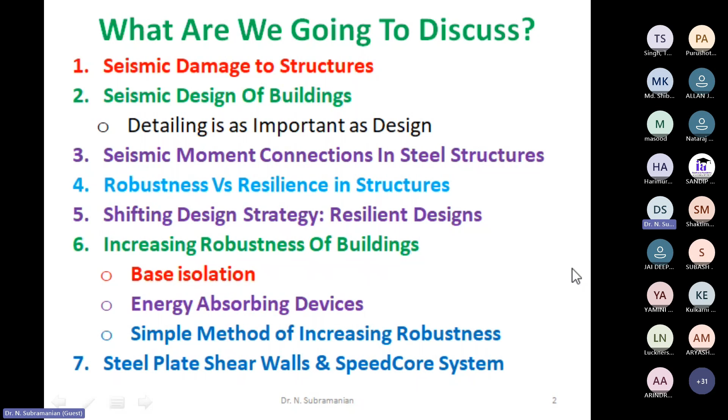There is a famous saying: earthquakes do not kill people, but improper design and detailing do. This is very correct, because in most of the previous earthquakes, we have seen these collapses occur.

Now we will see the factors influencing seismic damage: peak ground acceleration, peak ground velocity, ratio of PGV versus PGA, peak ground displacement (which is difficult to determine), amplitude, magnitude and duration, distance between epicenter and site, geographical conditions, soil properties at the site, and foundation type and characteristics of the building. So there are many factors influencing seismic design.

Here we see the damage of a steel building in Mexico City in 1985, which is a very important earthquake because Mexico City is on a soil bed which is very, very soft.

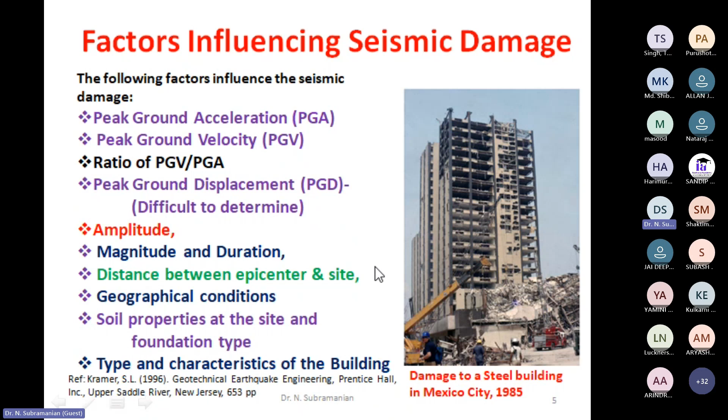As I already informed, during several past earthquakes we have seen several failures, and some of these I am listing here, with some shown in photographs: shear critical columns, weak columns and strong beams, sudden change in stiffness, plan and vertical irregularity. This shows a T-shaped building which collapsed completely. Also torsional irregularity, unconfined beam column joints, weak stories, floating columns, etc.

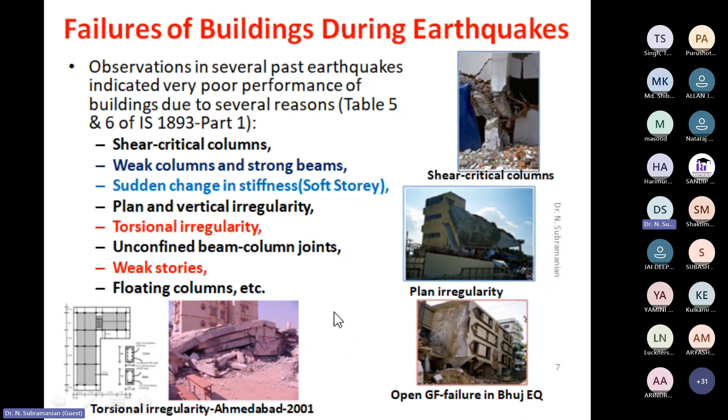Actually, in our designs, columns are more important than any other component, because columns transfer all the loads from top to the foundation. But enough care is not taken in the columns, and several failures have occurred.

These are categorized as buckling of column reinforcement due to insufficient lateral ties, insufficient transverse reinforcement in beam column joints (which you cannot see, but is due to beam column joint failure), poor anchorage of beam bars in beam column joints, provision of strong beams and weak columns, and improper detailing in plastic hinge zones.

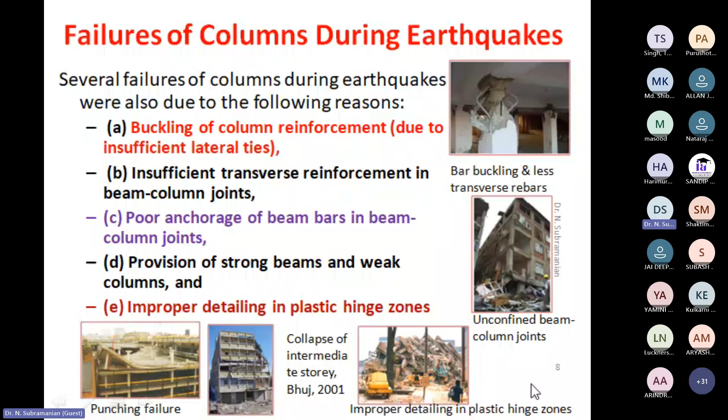And this failure is due to punching failure, which is not exactly a column failure, but due to the thin slab. I wanted to show this slide always.

Of course, these are other failures during earthquakes. This is pounding, that is when two buildings are close to each other. And this is a soft story, we have already seen. And then the collapse of a water tank.

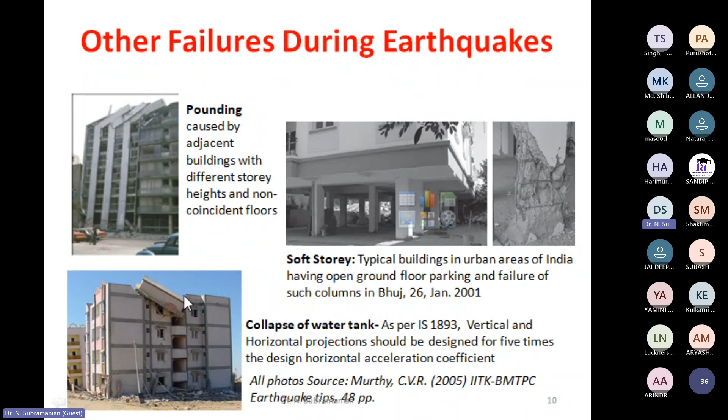Actually, as per our code, all projecting things, horizontal as well as vertical, should be designed for 5 times the design horizontal acceleration coefficient.

This I just wanted to include. This is a recent Myanmar earthquake. You might have seen this because it was viral in social media. This is the collapse of a tall building in Bangkok, the unfinished headquarters of the Auditor General's office, and this is the only skyscraper to collapse in Bangkok.

This building used flat slab construction, which is no longer recommended in earthquake-prone zones, in our code especially. Additionally, long slender columns were seen in the ground floor.

Probably this Bangkok soft soil could have amplified ground motion 3 to 4 times, and you see this collapsed building, completely collapsed. It was a new, yet to be opened building.

And when I saw this collapse, I found that there was a punching failure at the top, and then due to that, the last floor failed on the next floor, causing a hammer effect, and then it collapsed immediately within seconds.

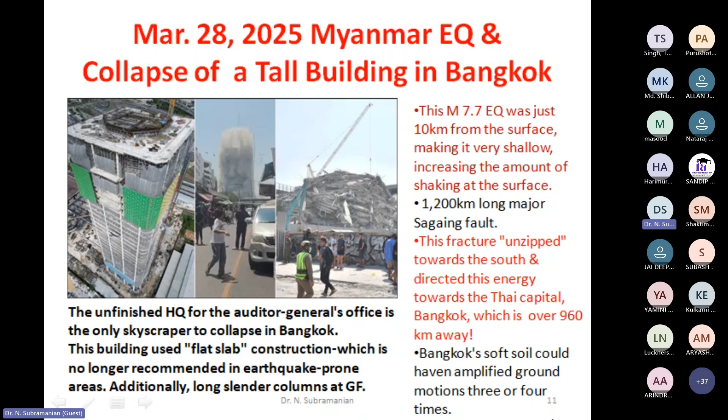So now we will see seismic design of buildings. As you all know, there are so many codes in India. IS 1893 is the basic code which is under revision.

IS 13920 is the detailing code for concrete structures, and there is only one more new code, IS 18168-2023, for seismic detailing of steel structures, and there is one more code, IS 4326-2013.

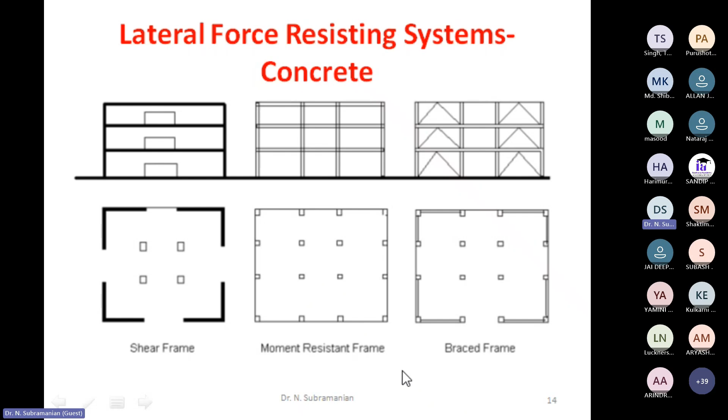So as per these codes, we have to have lateral force resistance systems, and I am showing some of the systems in concrete: shear walls. This is the best system, and then next is braced frame, and then finally moment resistant frame, which we are mostly adopting, which is not very good.

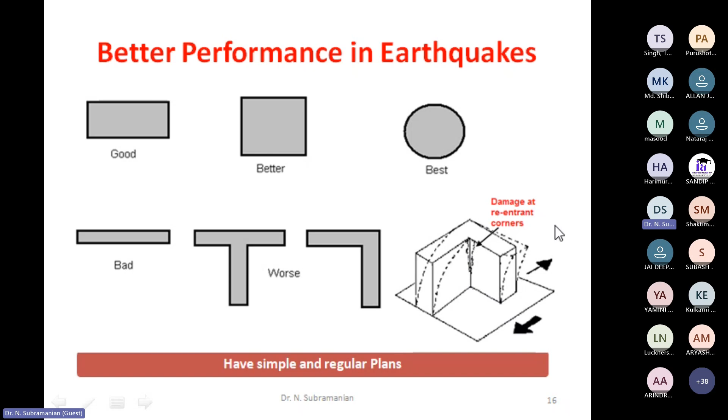Actually, before doing analysis, the planning is more important in earthquake resistant design. Unfortunately, this aspect is not controlled by us, it is controlled by architects. So whenever you see a plan, you have to discuss with the architect and educate them about the earthquake effects on those plans.

So the effect of asymmetry will induce torsional oscillations in structures and stress concentration at re-entrant corners, and hence they have to be omitted. Irregularities are to be avoided. They are listed in IS 1893 Part 1.

Of course, the 2025 version will come soon, and anyhow these things remain the same: plan irregularities, vertical irregularities. Under that, there are so many other categories you already know, or otherwise you can see IS 1893 for those details.

I just wanted to show this book. This is Seismic Conceptual Design of Buildings by Hugo Bachmann. It was released in 2002. You can download this book free of cost from the internet at this link.

Actually, this shows the basic principles of the seismic design of buildings. If your architect is adamant, you can even buy this or download the book and give it to your architect to show how to plan the buildings. So this shows a lot of planning of buildings and failures due to improper planning.

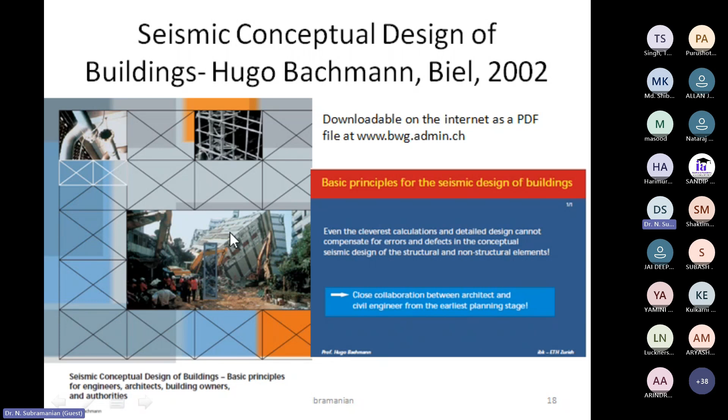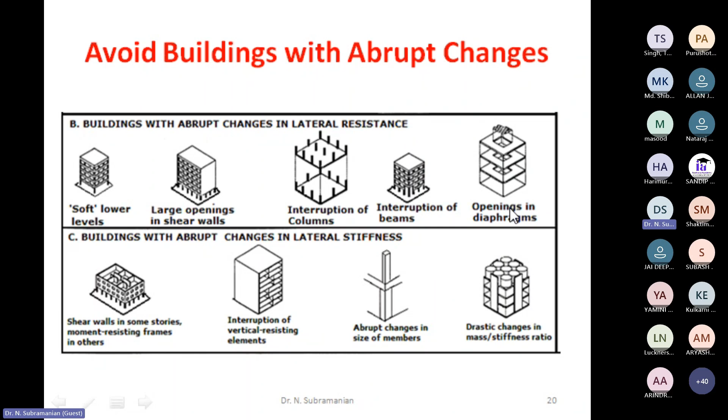The abrupt changes in the plan or the vertical configuration should also be avoided, as we have already seen. Interruption of columns, interruption of beams, interruption of shear walls, and openings in diaphragms — all these things should be avoided.

Can we design to resist earthquake with no damage? Yes, we can, but they will be very expensive and unwarranted for the small probability of occurrence of such catastrophic earthquakes, because no one till now can say when an earthquake will come and what its intensity or magnitude will be.

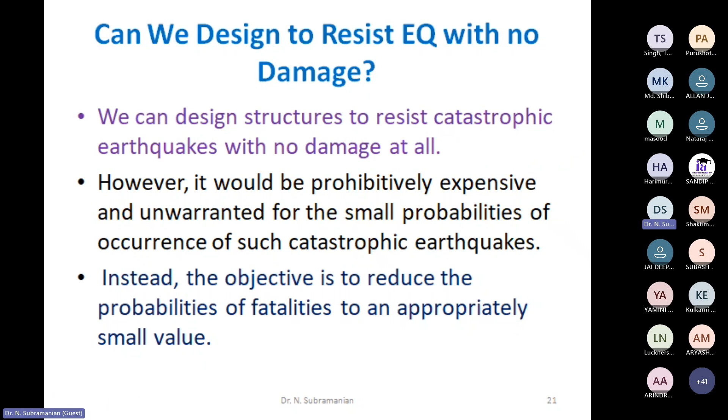So our objective is to reduce the probability of fatalities to an appropriately small level. Hence the seismic design philosophy used in IS 1893 is: minor and frequent earthquakes should not cause any damage, moderate earthquakes should not cause significant damage but could have some structural damage, and major infrequent earthquakes should not cause collapse — meaning there will be severe damage. Hence, design is done for much smaller forces than the actual seismic loads.

This is different from other loads like wind, dead, live and other loads, where we calculate and use the exact loads. It is not possible to predict where an earthquake will strike and its magnitude or intensity, so the philosophy followed is this: this is the actual linear response, but we also always have nonlinear response, so we consider ductility, redundancy, and overstrength, and then design for these smaller forces.

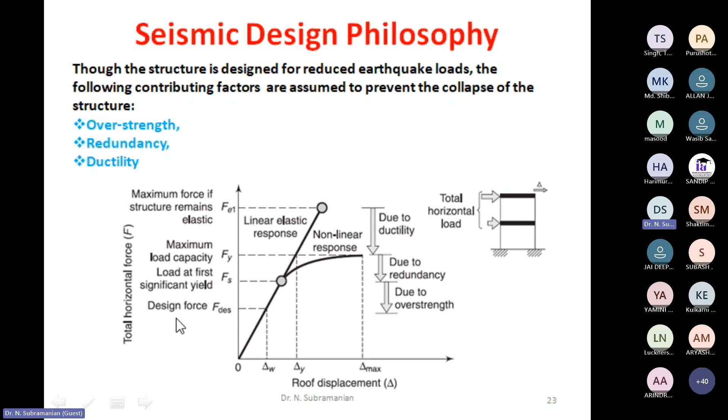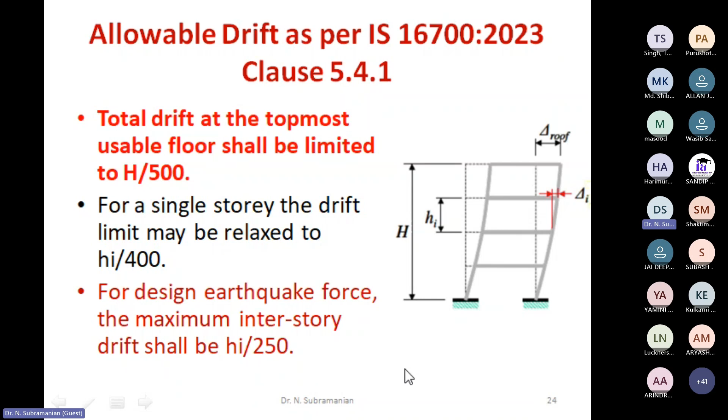One important thing I want to insist on is that we should always reduce the drift. The total drift at the topmost usable floor, as per IS 16700, is H by 500. For single story, the limit should be relaxed to Hi by 400, where Hi is the individual floor height. For the design earthquake force, the maximum interstory drift shall be Hi by 250.

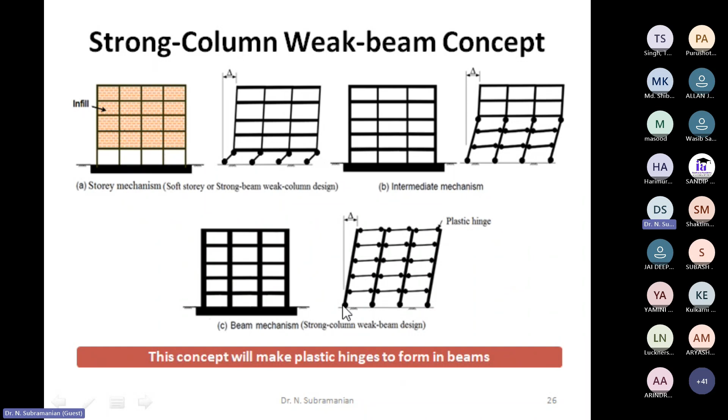This has been stressed in many seminars and webinars: we should have a strong column and weak beam, and we should not have a weak column and strong beam, because in that case all the columns will fail. This concept ensures plastic hinges form in the beams, and only at the end do hinges form at the column base. Once again, detailing is as important as design.

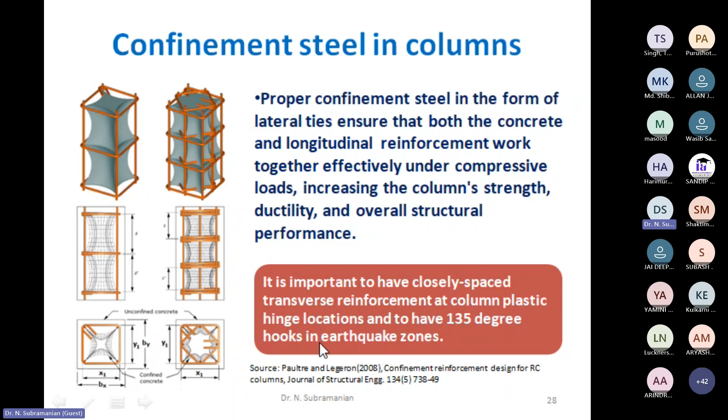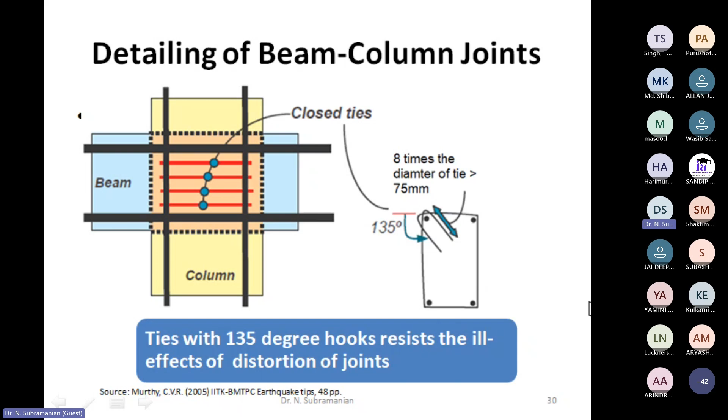If there is a short column, it is better to provide closely spaced ties throughout the length of the column, not only in the plastic hinge zones. Beam column joints are often omitted because they are very difficult to provide, but they are very important. Here also we have 135-degree hooks which resist the ill effects of distortion of joints.

Once again, detailing of shear walls: it is important to have closely spaced transverse reinforcement, spaced at less than 5D, where D is the diameter, in boundary elements of structural walls and columns. I have shown these things which you may already know.

This is a wall failure during the 2011 Christchurch earthquake in New Zealand.

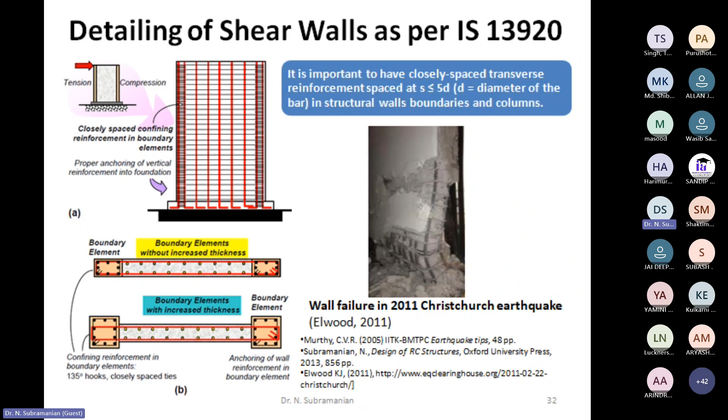Coupling beams are very good in earthquakes for dissipation of energy. Previously people were using reinforcement like this and this, but Professor Santakumar of Anna University, when doing his PhD with Professor Paulay of the New Zealand University, developed this system of diagonal reinforcement, which is now adopted in most codes.

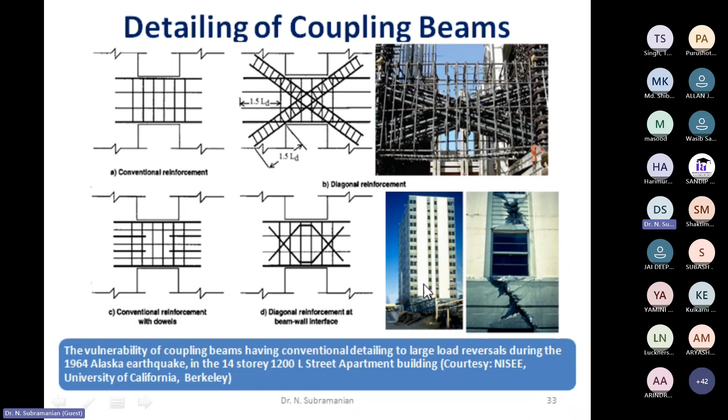You can see that using this normal conventional reinforcement, there was failure in these coupling beams during the Alaskan earthquake. This is a 14-story apartment building, from the 1964 earthquake.

Now we will go to see seismic moment connections in steel structures.

Of course, these structures are provided, or you can refer to pre-qualified connections for steel SMF for seismic applications, AISC 358-22. It gives details and design of several connections which have been pre-qualified. That means they have tested all these connections thoroughly, and then developed the equations for these connections, and those equations are all provided in this document.

There are mainly three strategies: toughened connections, strengthened connections, and weakened connections. The main aim is to shift the plastic hinge location from the beam column joint to a point away from the beam column joint. So mostly if you provide these connections, the plastic hinge location will not form here, but will form here. These are other possibilities: using cover plates, using ribs, using side plates.

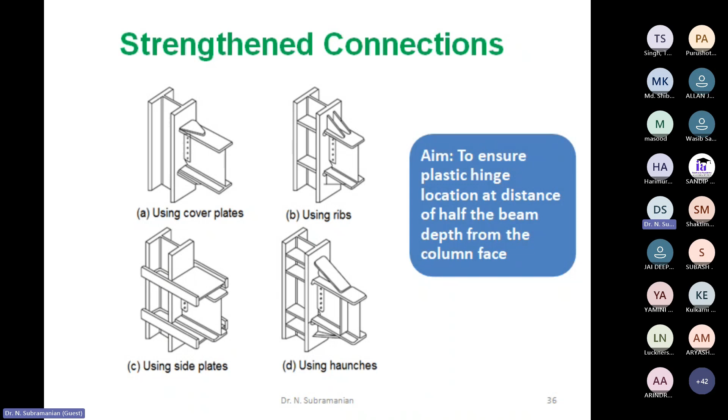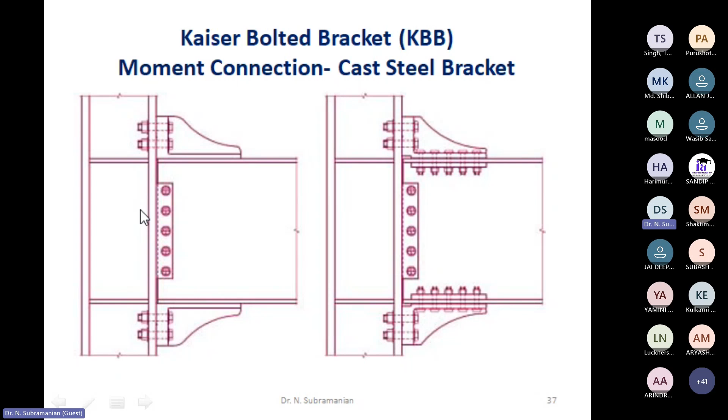Actually, the first thing which was developed was the dog bone weakened connection, where they shaved off some portion in the top flange and the bottom flange, and the radius is given here. There can be so many different possibilities: one is straight cut, tapered cut, and also through constant holes or increasing hole diameters in order to reduce the area, so that the plastic hinge will form away from the beam column joint.

Here I have given some cost estimates. This is a pre-Northridge welded flange bolted web. If you take it as one, other things are more expensive than this, because it requires extra fabrication. This radius cut dog bone joint is cheapest, 1.71 only. Of course, the relative cost is only for this joint portion, not for the total building. You see, top and bottom haunch will be the most expensive, because it requires extra fabrication and also extra material.

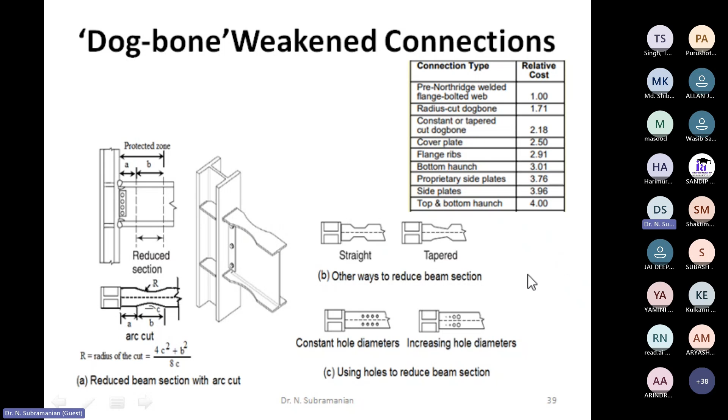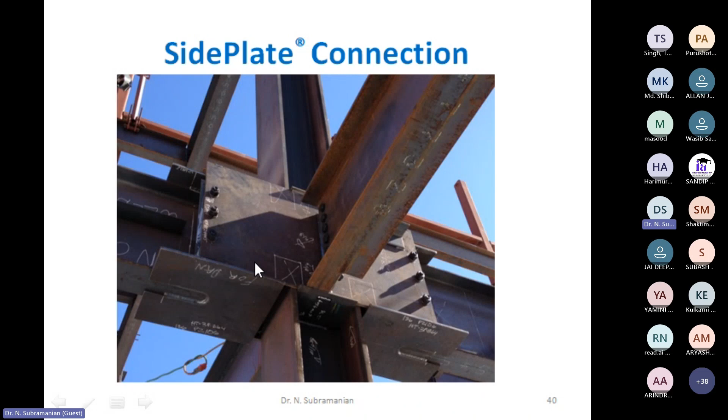Now we will see what is robustness versus resilience as applicable to structures. Robustness is defined as the ability of a structure to withstand events like earthquake, wind, fire, explosion, etc. without being damaged, whereas resilience is the capacity to recover and return to full function after experiencing damage from an extreme event, focusing on the ability to bounce back after disruption. Thus, robustness is about preventing significant damage in the first place, while in resilience there can be damage, but recovery is fast.

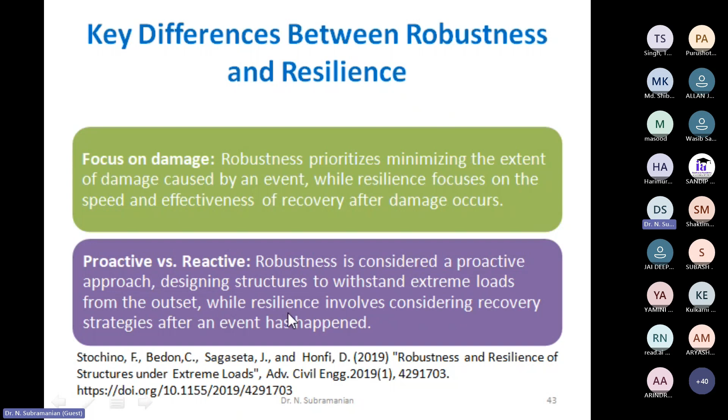So these are the key differences between robustness and resilience. One is focus on damage: robustness prioritizes minimizing the extent of damage caused by an event, while resilience focuses on the speed and effectiveness of recovery after damage occurs. So robustness is considered a proactive approach, while resilience involves considering recovery strategies after an event has happened.

Examples of robust and resilient design: a building with redundant structural elements and strong connections to prevent localized collapse in case of an earthquake represents robust design. Whereas in resilient design, a building with easily replaceable components and rapid repair mechanisms to quickly resume function of the building after a natural disaster.

I just wanted to show you an example of a resilient building. I will show one more resilient building later. This is the Empire State Building in New York. It is a 102-story building, 443 meters tall, and it was designed and built during 1930 to 1931.

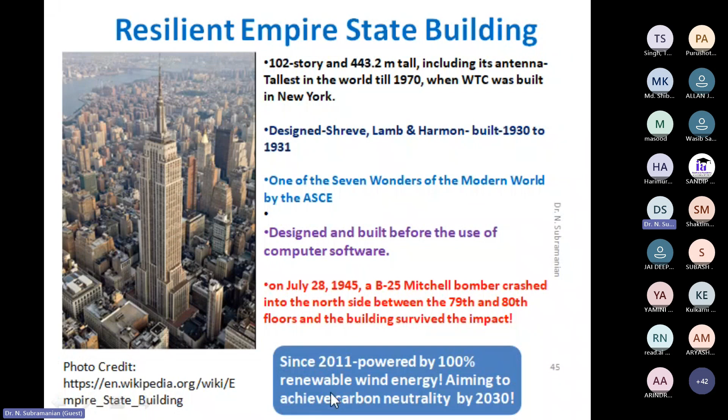A very interesting thing is that it was designed and built before the use of computer software. So you see that they built such a tall building without using computers, because big computers or computer software were not available at that time. On July 28, 1945, a B-25 Mitchell bomber crashed into the north side between the 79th and 80th floor, and the building survived the impact. Of course, New York is not earthquake prone, but even with such things the building is able to manage. Since 2011, it is powered by 100% renewable wind energy, aiming to achieve carbon neutrality by the year 2030.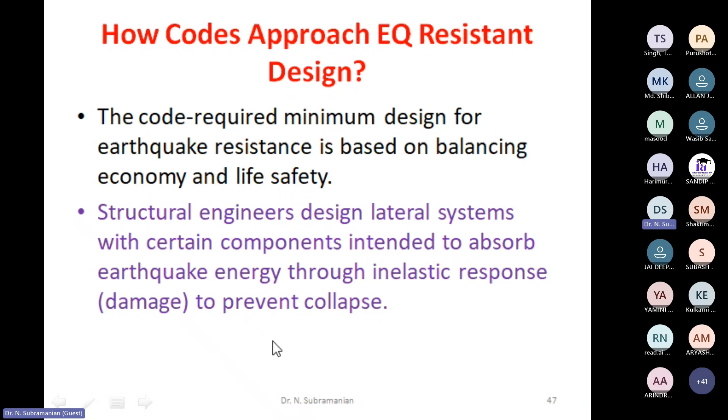So we will see now what is resistant design. The code requires minimum design for earthquake resistance based on balancing economy and life safety. Structural engineers design lateral systems with certain components intended to absorb earthquake energy through inelastic response to prevent collapse.

Let us compare the number of fatalities between the 2010 M7 Haiti earthquake, that killed 200,000 people, and the 2011 M6.2 Christchurch earthquake in New Zealand, in which only 180 people died. Clearly, the ductility-based seismic design adopted by our codes is successful at providing life safety. That was the main intention of the codes.

But in Christchurch Central Business District alone, more than 1,400 buildings were demolished. At the time of the earthquake, the population of Christchurch was approximately 350,000 only. Think about the damage in larger cities like San Francisco, Los Angeles, New Delhi, or other big cities, Bombay, in India. The number of buildings that would be damaged and then require either very long and costly repair or demolition would be much greater.

So structural engineers should initiate discussions related to functional recovery objectives early in the design process. Engineers should clearly communicate to the owners that meeting a code minimum will result in damage that could require repairs that render the building partially or completely unoccupiable for months to years following an event.

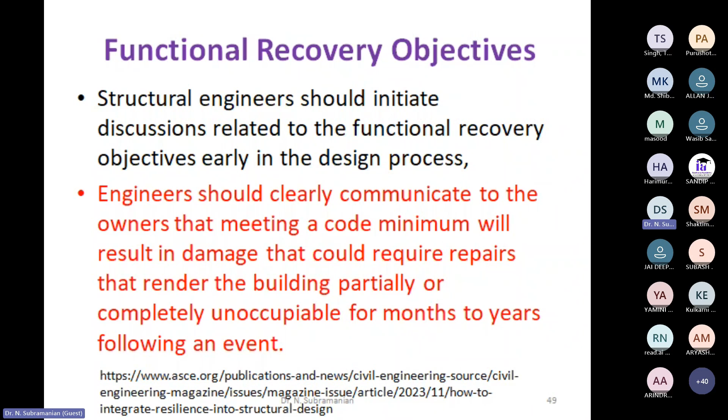For example, if a beam is damaged, our codes allow plastic hinges to form in the beams. So if the beam has to be replaced, you know how difficult it is.

So the functional recovery objectives are critical in selecting the lateral and gravity systems. Different lateral systems we have seen already: shear walls, brace frames, moment frames, etc. have different functional recovery characteristics.

Shear walls and brace frames tend to have lower relative story drifts, but they have higher floor accelerations. Moment frames tend to have higher relative story drifts, but lower floor accelerations. Both structural and non-structural damage are affected by the dynamic characteristic of the lateral system.

Very stringent functional recovery objectives may require the use of seismic isolation or supplemental viscous dampers, which we will see at the end of the lecture.

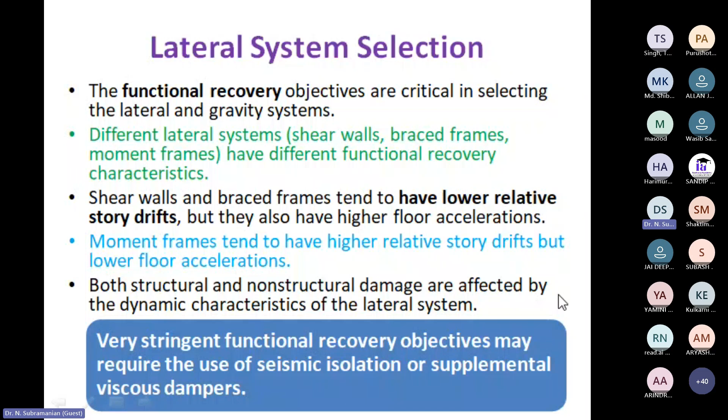High ductility systems, as advocated by our codes, will incur significant damage in design level or greater earthquakes. The building code ASCE 7, for example, has provisions that improve functional recovery but require designing for higher forces and decreasing allowable drift limits.

Actually, you may see in IS 1893, in the next revision, they are advocating for higher forces. These requirements improve functional recovery, but they have cost implications.

Strength and stiffness are two controls that structural engineers have that could affect functional recovery, but they are not the only controls available. So now let us conceptually see these things.

So when you adopt a reinforced concrete shear wall, flexural shear yielding at the base will occur, which is very difficult to repair after an earthquake. Whereas if you have a coupled shear wall, the damage will be in the coupling beam system, which can be replaced after an earthquake quickly.

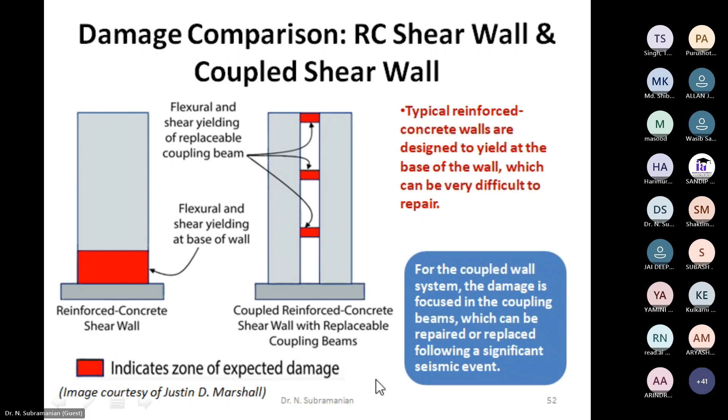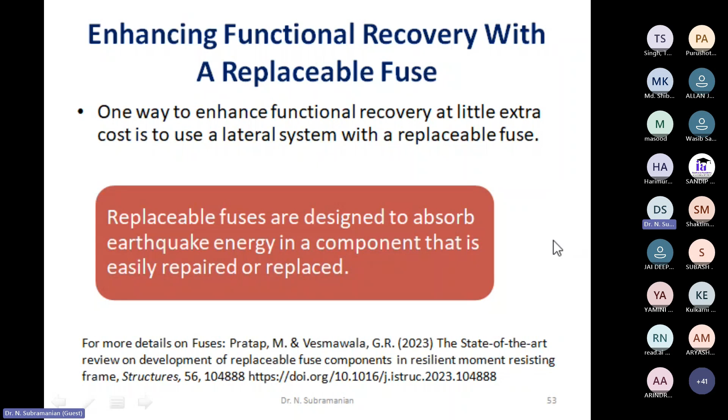One way to enhance functional recovery at little extra cost is to use a lateral system with replaceable fuses. This is a recent concept. Replaceable fuses are designed to absorb earthquake energy in a component that is easily repaired or replaced. We will see where these replaceable fuses are placed and how.

And there is a patented system called Durafuse moment connection. Although this looks complex, there is a fuse plate which only will be damaged. This is given in AISC 358-22. The details of this are given here, and this fuse plate, after the earthquake, if it is damaged, can be removed.

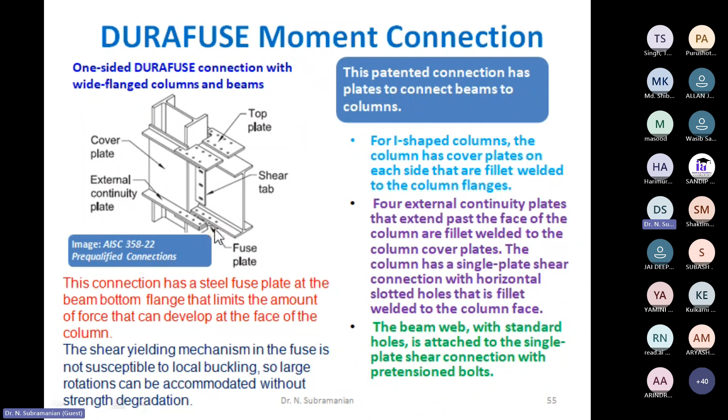Similarly, in braced steel frames, this is the normal brace frame. And if you use buckling restrained braces, they can be easily removed after an earthquake.

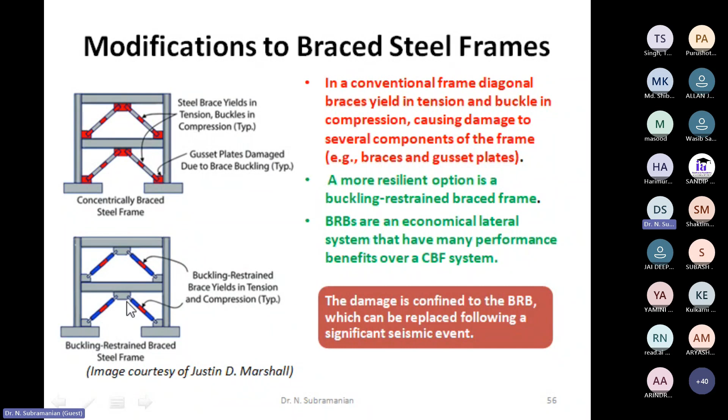Due to this high strength cable, the advantage is it can be self-centered. The damage is absorbed in the yielding fuses on either side of the frame, which are designed to be easily replaceable after an earthquake.

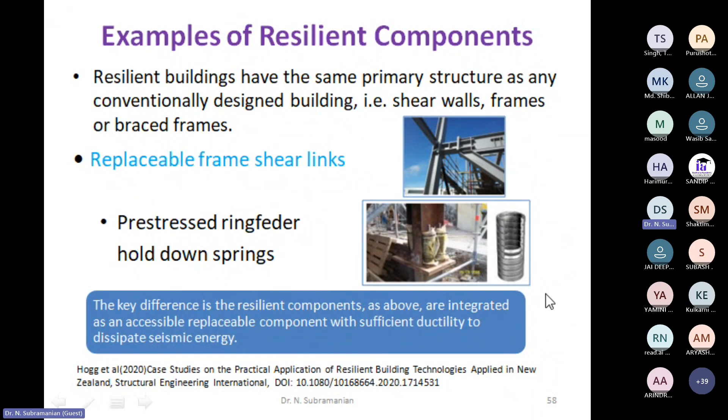The key difference is the resilient components as above are integrated as an accessible, replaceable component with sufficient ductility to dissipate seismic energy. A few more systems are shown in the next slide: compression, tension, yielding, buckling restraint braces, compression and tension yielding energy dissipators, sliding friction joints, lead rubber base isolation bearings, and concave friction slider base isolation.

Actually, they have found out that the cost premium for resilient building design is typically 1 to 3% of the total construction cost, whereas base isolation is more expensive, maybe 5 to 7% costlier than the building without these systems.

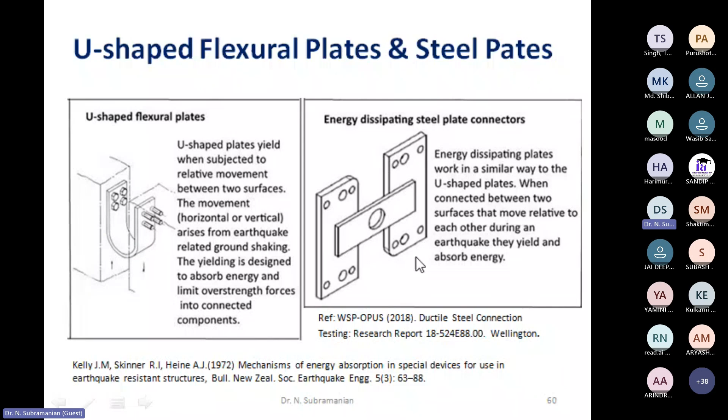So two more systems: U-shaped flexural plates, where, when it is moving like this, the energy is dissipated, and energy dissipating steel plate connections. So this is an example of this steel plate connection. This is Superlot 7 buildings in Christchurch.

This is a precast concrete wall where they are coupled with ductile weld plate connectors of 10 to 20 thick. The plates can be accessed and replaced if necessary, and usually they are hidden from view. All the precast walls in the longitudinal directions are detailed to allow for ductile response at the base, as required by the coupled wall system, by long debonded length of starter bars connecting the panels to the foundation.

So the hysteretic energy is dissipated by plate yielding. The plates acting as—so this is the yielded plate—the plates acting as a yielding fuse. Each connector is welded to the cast-in plates.

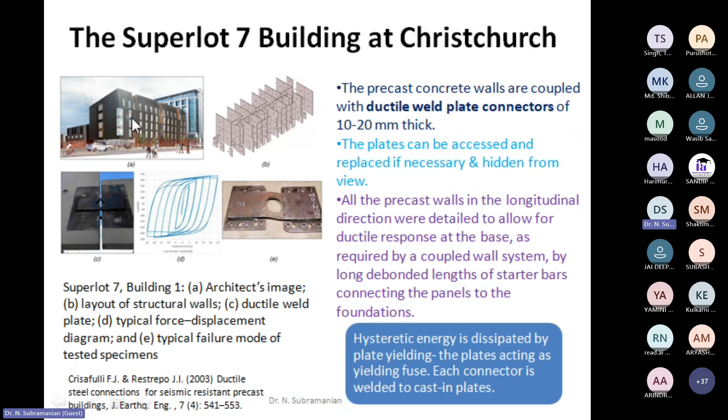So this shows the final building, and this is the performance during test. In the previous thing, in the test, you don't see the pinching, which is normally seen in poor connections.

These are the systems. These ringfeder springs combined with concentric braced frames are designed to rock and uplift at the base, dissipating energy and restoring the frame to vertical. The springs have pre-compression applied to counter uplift forces due to seismic action. In some cases, additional post-tensioning can also be applied to supplement the spring compression.

This shows another example, the Nelson Marlborough Institute of Technology, using post-tension rocking timber shear walls. Actually, this is a timber building. This building was built in 2009 and has an all-timber multi-level post-tension rocking wall structure combined with U-shaped flexural plates, seen here.

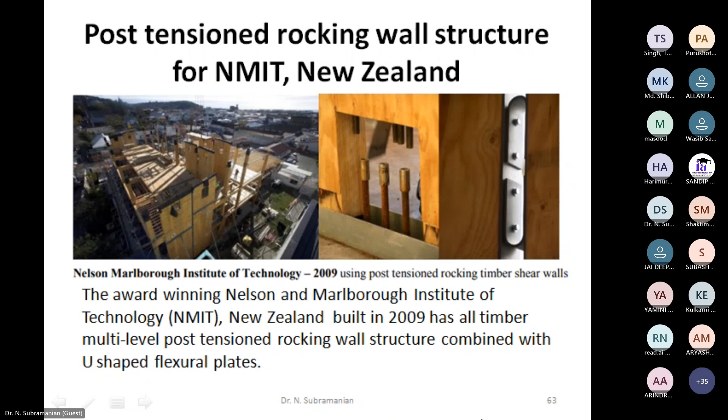So this is also called plug and play dissipators. They are mild steel bars which yield in both tension and compression. Actually, these bars are confined by the steel tube. You see the steel tube here filled with grout and epoxy, which is similar to the buckling restrained braces.

The dissipators activate with the opening of a gap and are typically used in rocking structural systems, providing ductility. The yielding and plastic straining is concentrated over a defined length, only this length, through the use of reduced steel area, which you cannot see here—that reduced steel area is inside these tubes.

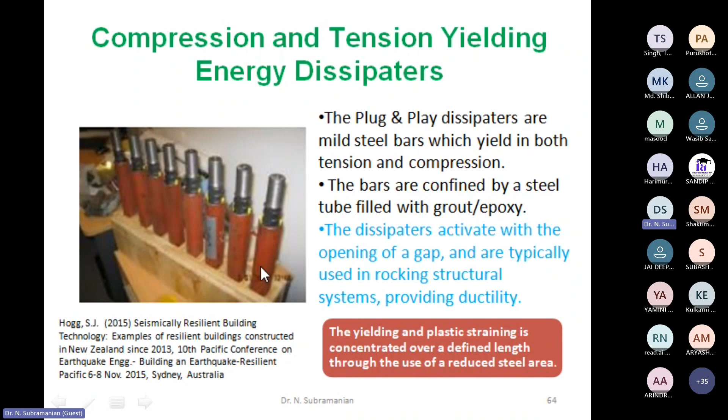Another example: this is a two-way sliding hinge joint at Te Tiriti Stage 1, once again in Christchurch. This seismic energy in this case is dissipated by controlled sliding of tension steel plates with minimum damage to the structure. Now observe this figure.

It is designed so that the beam is pinned here at the top and is connected to the bottom flange of the web by a unique asymmetrical friction sliding detail, which functions via rotation generated by seismic moments. This joint dissipates energy by opening and closing each time, pivoting about the top flange connection.

They are rigid under working load, slide under design level earthquakes, and return to rigid connection at the end of the earthquake shaking. The bolts and friction plates could be replaced if necessary, because these are only connections, which can be easily replaced instead of changing the beam itself.

Now we will see how robustness can be increased in buildings. Base isolation will prevent vibrations of the top building, so it is confined only to the bearings. You can also have additional base isolation systems.

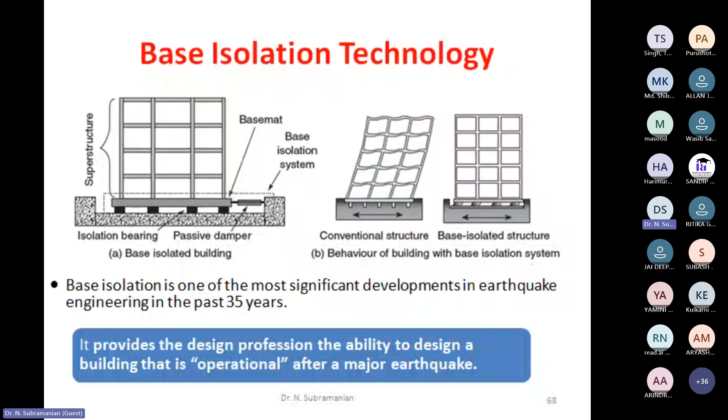This is the most significant development in earthquake engineering in the past 35 to 40 years. It provides design professionals the ability to design a building that is operational immediately after a major earthquake, and even during earthquakes. Many buildings have this system, and I will show some examples.

One example is the William Clayton building in New Zealand, the first base isolated building. Isolators are available up to 1600 millimeter diameter and around 600 height, and can have 800 mm shear displacement.

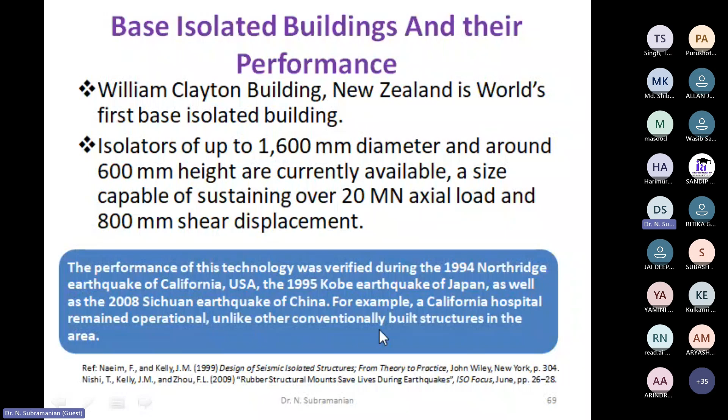The performance of this technology was verified during the famous 1994 Northridge and 1995 Kobe earthquakes in Japan, and even during the 2008 earthquake in China. For example, a California hospital remained operational, unlike other conventionally built structures in the area which all collapsed.

Another example is the base isolated LA City building. As I already told you, base isolation costs 5 to 7% of the total cost of the building. Each isolator can extend in any direction up to 21 inches.

San Francisco Airport International Terminal is the world's largest base isolated building. The Christchurch Art Gallery in New Zealand is another example.

I wanted to show one more example from India, the latest building, the Indira Gandhi Hospital building in New Delhi, a major base isolated hospital built by CPWD. The first such building was in Bhuj, a 300 bed district hospital with 280 lead rubber and sliding bearings.

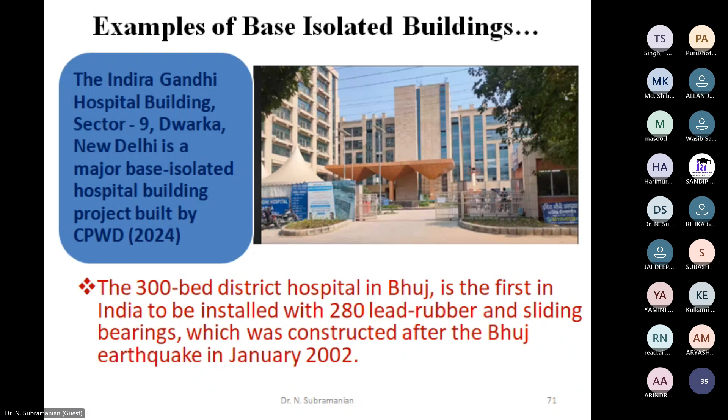There are many types of seismic isolators. You can see the details in my paper published in 2024. Of course, we will concentrate only on elastomeric bearings and sliding bearings.

Base isolators may be either coil springs or laminated rubber bearing pads made of alternate layers of steel and rubber, and have low lateral stiffness so that they will deform during earthquakes. This is an actual photograph of this bearing.

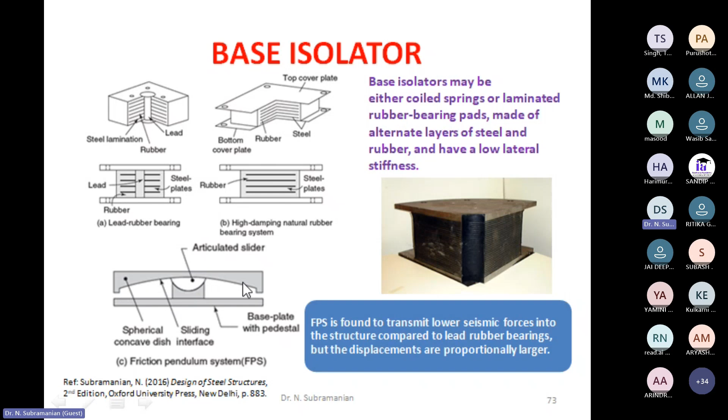Friction pendulum systems are shown here. This system is found to transmit lower seismic forces to the structure compared to lead rubber bearings, but the displacements are proportionally larger. Actually, it moves on this curved plate.

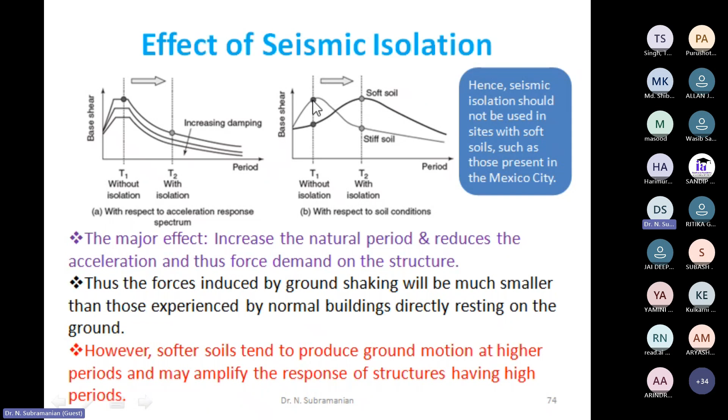Base isolation should not be used in all places, especially with soft soils. This is the response during ordinary soil: T1 is without isolation, T2 is with isolation, so base shear is reduced. Whereas in soft soil, with isolation, base shear is increased.

You may be interested to know there is an Indian code on base isolation. Several codes are available in other places also, like ASCE 2014, Eurocode 15129, etc. This Indian code provides guidelines for estimation of design lateral force and displacement to be considered. As per this code, very interestingly, ductile detailing of the whole structure is necessary even in base isolated buildings.

Now we will see what are the energy absorbing devices. Passive energy dissipation is an emerging technology that enhances the performance of buildings by adding damping. So damping is another important aspect.

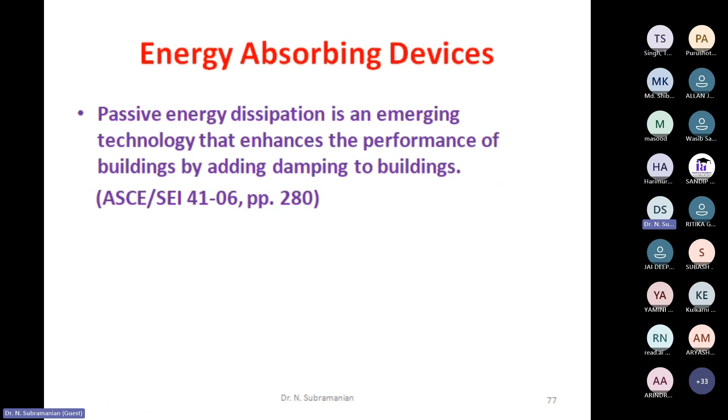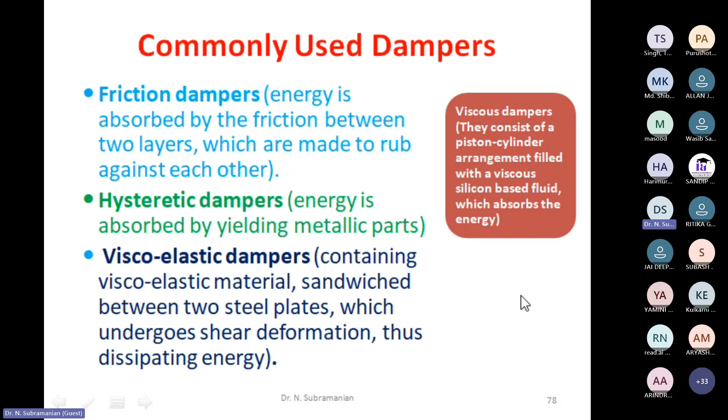Some commonly used dampers are friction dampers, hysteretic dampers, and viscoelastic dampers. Viscous dampers consist of a piston cylinder arrangement filled with viscous silicon fluid, which absorbs the energy. Other types are tuned mass dampers, tuned liquid dampers, and hydraulic actuators.

Dampers dramatically decrease earthquake-induced motion, with less displacement, over 50% reduction in drift in many cases, decreased base shear, and interstory shear up to 40% decrease. This offsets the damper cost and can sometimes even reduce overall cost.

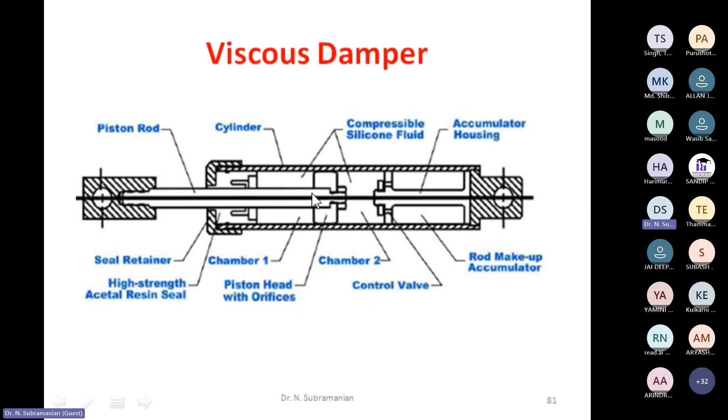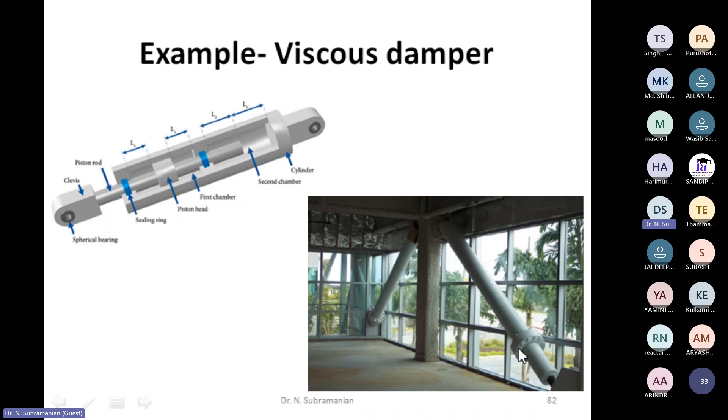This shows the diagram of the viscous damper, with a compressible silicon fluid. When it is moved, this silicon fluid is compressed and we get the damping. This shows an example of a building where dampers are mostly present as diagonal members.

This is an excellent example of a tuned mass damper in Taipei 101, which at that time was the second largest skyscraper. This one is 5.5 meter diameter, 730 ton TMD, acting like a giant pendulum to counteract the building's movement, reducing sway due to wind by 30 to 40%.

The cost was $4 million. Though this area is exposed to heavy winds, this damper was also found to be effective during an earthquake that occurred in this place.

So we now come to buckling restraint braces. This is a damper that was introduced by Takeda in 1976 and deals with the buckling problem of tension and compression steel braces. Actually, the original concept was developed by late B.N. Sridhara of Bangalore. Several other researchers also studied and developed different configurations such as circular core, cross and crosswise core, and linear core.

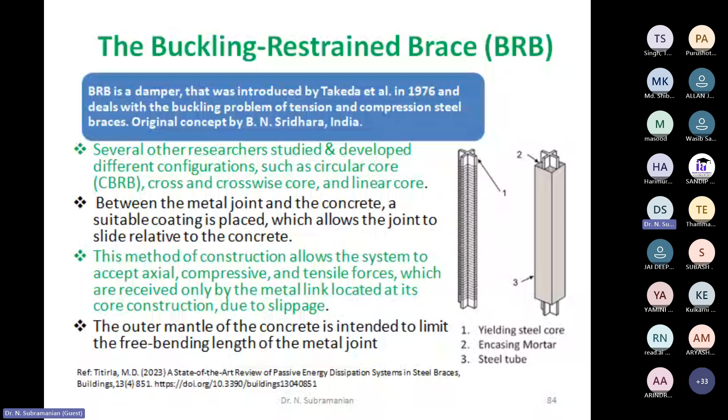Professor Sridhara came to my office about 25 years ago and showed this concept using a steel tube and a small rod. Once you press the rod, it buckles, but it continues to take the load. Usually in structural engineering, once an element is buckled, it is unable to take further load. But because of the tube, this buckling is restrained and it continues to take the load. That is the concept of the buckling-restrained brace, and from that they have developed this actual system.

So now we will just see how simply we can increase the robustness.

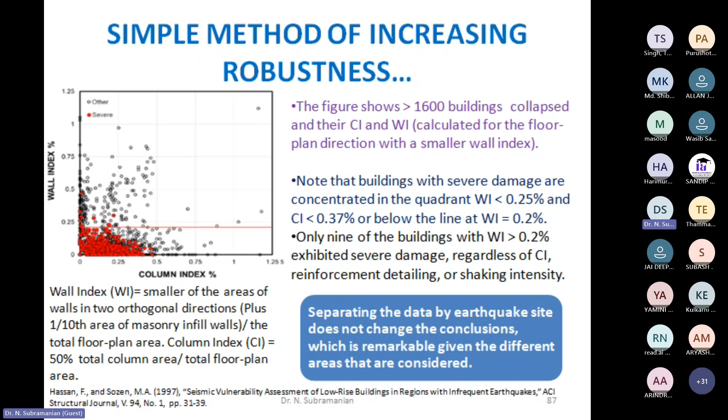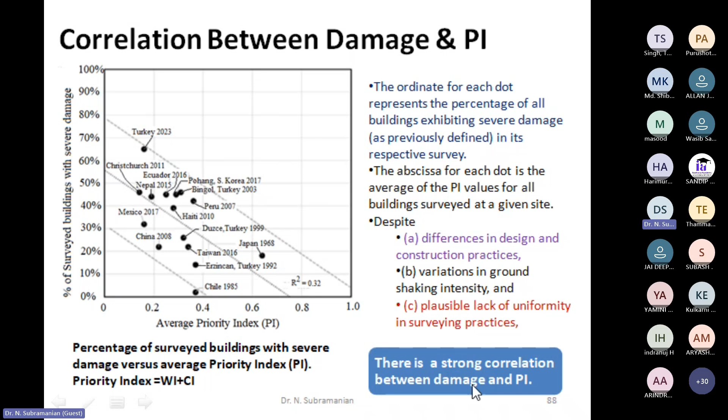Separating the data by earthquake site does not change the conclusion, which is remarkable given the different areas considered, not only in the USA but also in different places. Another correlation is with the priority index, which is equal to wall index plus column index. You see that in Turkey it is very bad, 70% of the damage, whereas in Chile, a lot of buildings are built with structural walls. There is a strong correlation between damage and this priority index.

Based on that, and in the absence of rigorous field quality control and exhaustive testing, adopt a minimum structural wall area as below to get robustness: 0.2% into n, where n is the number of floors. For buildings less than 15 stories, detailing is critical to safeguard against larger ground motion intensity and drift demands. It is better to lower drift demands to about 1%, as deformation drift can damage partitions, facades, and finishes. This will also result in increased functionality of buildings and cities after earthquake. In taller buildings, wall density of 3% of the floor area in each direction is sufficient as per Chilean tradition. You may be interested to know that 2% has been stipulated in IS 1893-2016 for RC framed buildings with open stories.

Finally, we are going to discuss two more systems. One is the steel plate shear wall. There can be three different types: unstiffened, stiffened, and also composite concrete SPSW.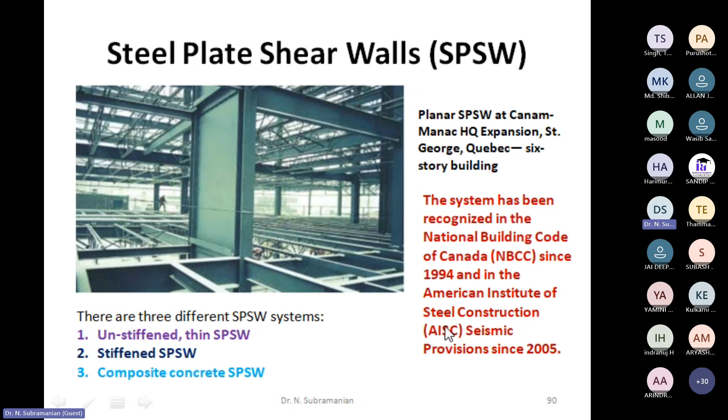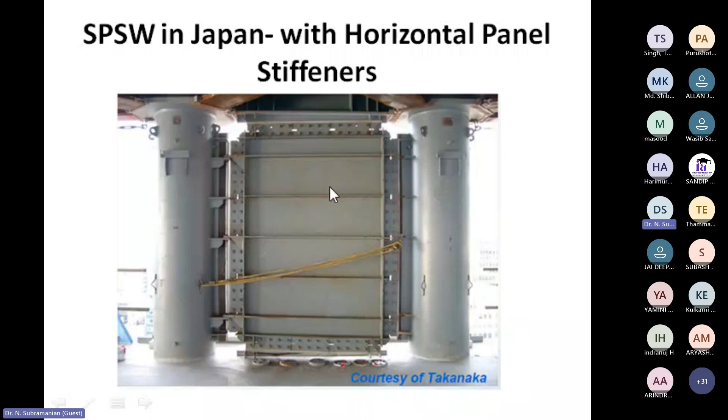This shows an example in Quebec, Canada, in a 6-story building. This system has been recognized in the National Building Code of Canada since 1994 and also in the AISC since 2005, with provisions available. This shows a horizontal SPSW in Japan with horizontal stiffeners, and here, horizontal stiffeners as well as vertical stiffeners.

The advantages of SPSW: if detailed properly, up to 4% drift without damage, thinner walls, actually less structural wall thickness compared to RC shear walls. The average wall thickness of the Century project was 450 mm as opposed to RC shear wall of 700 mm, saving 2% in gross square footage, and it is lightweight.

Lower building weight reduced the foundation and overall building seismic loads. In the Century project, the total weight was 18% less than the RC shear wall core system.

It can be welded, field bolted, no curing time. Construction is easier than concentrically braced frames. Actually, the Century project achieved a 1 month reduction.

At least 2 buildings using SPSW as primary lateral force system have undergone significant earthquake ground shaking and found to be effective. Easy to retrofit.

Of course, there are some drawbacks. They are more flexible. Excessive initial compressive force in the steel plate panel may delay development of tension field action.

This tension field action is similar to the plate girders. In the US Federal Courthouse project, welding of the steel plate splice connection was delayed until most of the dead load deformation occurred to relieve the pre-compression within the steel plate shear walls.

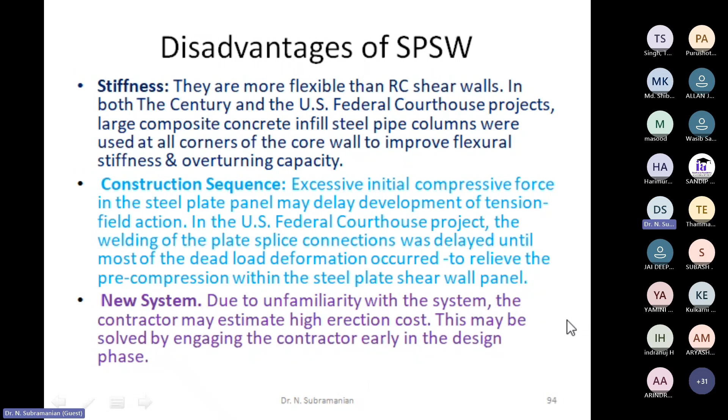These are some examples of buildings which have a steel plate shear wall system. The Kobe office building survived the Kobe earthquake in 1995 with minor damage.

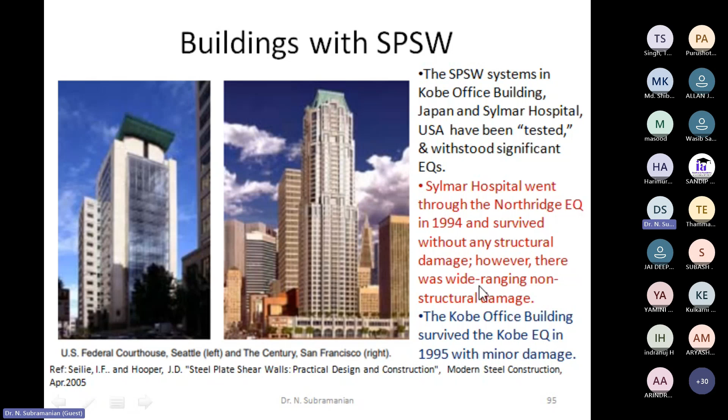This Sylmar hospital went through the Northridge earthquake in 1994 and survived without any structural damage. However, there were wide-ranging non-structural damage. Of course, you can have some openings also.

Another innovative composite steel core system was developed by Magnusson Klemencic Associates and Professor Varma and also Professor Bruneau. These professors tested the system in their laboratories.

This consists of steel plates. These are the two plates, which have the tie bar so that the two are connected, and there can also be a side plate, and then there are these shear studs.

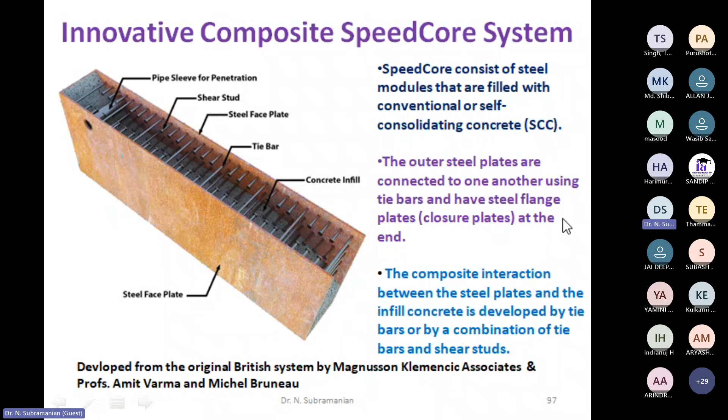The composite interaction between the steel plates and the infill concrete is developed by the tie bars, or by a combination of the tie bars and the shear studs. This is a composite SpeedCore system.

Actually, the empty steel module consisting of steel plate, tie bars and shear studs are prefabricated in the shop so that the quality is very good, and shipped to the site for final assembly and concrete casting. The empty modules are stacked to a certain height, typically 2 to 3 stories. We will see the next slide about that, for each placement of concrete, and the process is repeated as the structure is constructed.

The steel plates act compositely with the hardened concrete, and the tie bars or steel studs, shear studs, act as anchorages. These regularly spaced steel anchors and tie bars restrain local buckling of the steel face plates, provide horizontal shear resistance, and develop composite action between the steel plates and the concrete infill. So here you see, this is how it is constructed.

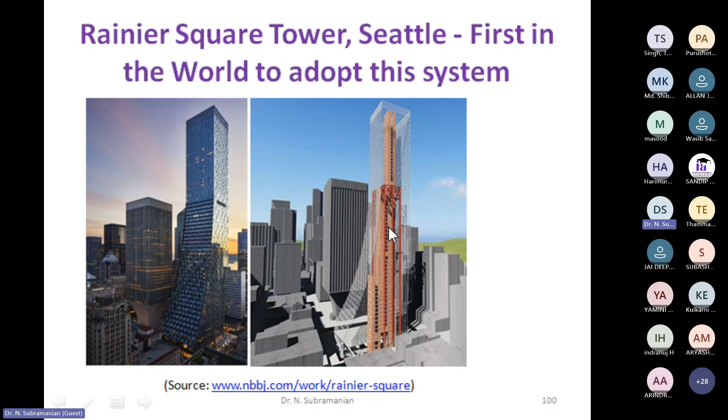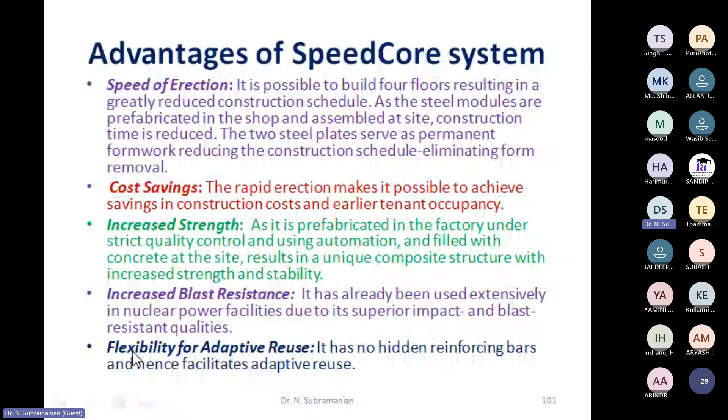This is the first example where this thing is used. This is the actual completed building, and this shows the central tower with the system. This building is in Seattle. The advantages are speed of erection, cost saving, increased strength, increased blast resistance, and flexibility for adaptive reuse.

Actually, code provisions were included in the AISC 360-22. It addresses non-seismic applications in Chapter I, Fire Resistant Design Provisions, Appendix 4. AISC 341-22, Section H7 addresses seismic design. A new Section H8 will cover capacity design principles, limits on the applicability of coupled SpeedCore, and other detailing requirements. A new Design Guide 38 has also already been released.

This is another example, as I told you I would show another example of a robust building. This is the Torre Latinoamericana building in Mexico City. This was built in 1956 with a height of 188 meters and 44 stories.

And this was designed by Mexican engineers, and then proof checked by Professor Nathan Newmark at the University of Illinois. Actually, this building withstood a Richter 7.9 earthquake in 1957 and also another Richter 8.1 earthquake in 1985.

Actually, the people in this building saw the other buildings nearby failing, and still this building withstood those earthquakes without any problem.

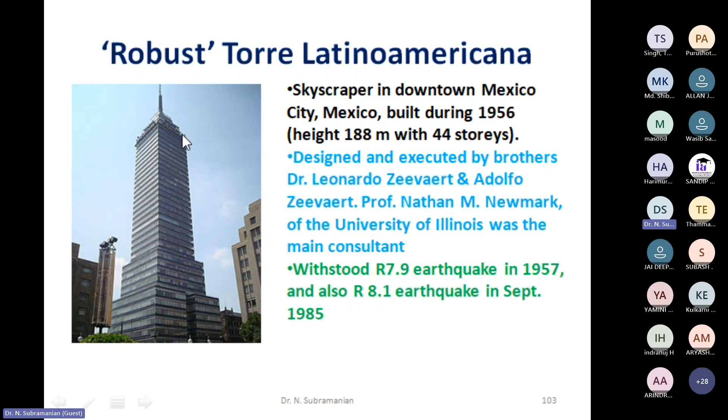So I just wanted to touch upon smart building technologies and adaptive materials. These SMAs, for example nickel titanium alloys, are advanced materials with the unique ability to return to a predefined shape after deformation when exposed to heat or stress. Their super elastic and shape memory effects make them highly beneficial for earthquake resistant and durable reinforced concrete structures.

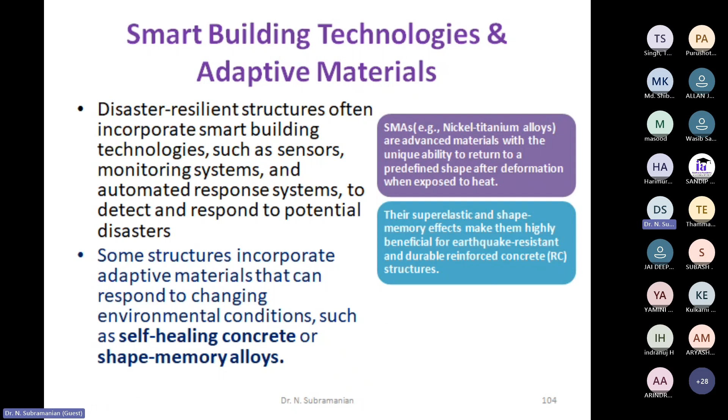Actually, these things are under research. So probably soon they will be adopted in future buildings.

This was reported by Marius Pinkwala. In one diagram, he has shown what are the different things to be adopted in earthquake resistant design - avoid soft stories, control torsion, design stiff foundation, etc. So I just wanted to show this to you. You can visit that LinkedIn site to see this thing.

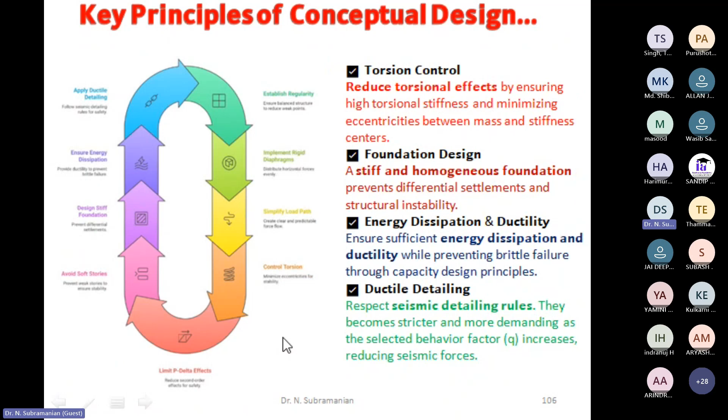So finally, let us summarize what we have discussed till now. Buildings with regular configurations and symmetric shape without irregularities are better in seismic zone. As per seismic design philosophy in codes, only a percentage of the earthquake load is considered using the response reduction factor.

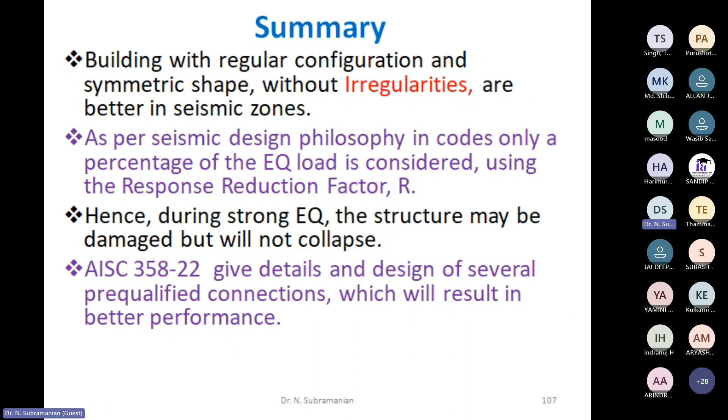Once again, I just want to tell you that the R factor used in the codes is not systematically developed. They are all based on engineering judgment and previous experience. Hence, during strong earthquakes, the structure may be damaged but will not collapse. So AISC 358-22 gives details and design of several pre-qualified connections, which will result in better performance than ordinary connections.

Resilient design is required for the functioning of structures after earthquakes. Examples of resilient buildings are those with incorporated special connection detailing, supplemental energy dissipating devices, rocking systems, and base isolation techniques. Of course, the technologies include structural fuses, innovative dissipative plate connectors, sliding hinge joints, etc. I have already shown some example buildings using these systems.

So extra cost is 1.1 to 3% in the systems which use these systems, and the extra cost will be 5 to 7% if it is base isolation.

Robust buildings are rigid buildings having natural period less than 0.1 second, which may not be affected much during natural disaster. We found that structural walls is about 2% area in buildings less than 15 floors and 3% in buildings greater than 15 stories were found to be robust. Some authors also suggest H by T ratio to be greater than 45, where H is the total height and T is the time period of the building.

Base isolation allows isolation of building from earthquake ground motion. Various types of base isolations have been developed and you have seen some of them. IS 1893 Part 6 provides guidelines for base isolated buildings, and energy absorption devices can be used to mitigate the effect of wind also. Innovative systems such as steel plate shear walls and speedcore systems can reduce the seismic damage.